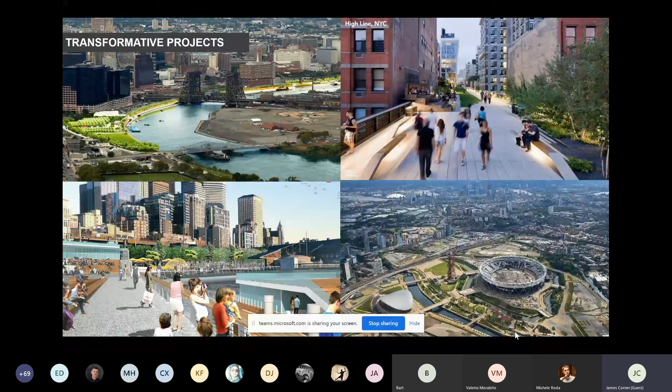I will get to that in a minute, because I wanted to just begin very quickly with a survey of what you would think Field Operations has been doing. I hope you know that we work on fairly big, complex and transformative projects — the High Line, the London Olympic Park, the Seattle waterfront. Our projects work with nature and ecology and environment, helping to bring green and nature and sustainable systems into the city. And we design essentially for people, for the theatricality of people being able to simply be amongst other people in public space.

The High Line, a landmark project, a wonderful garden in the sky, a promenade, in contrast to the urban fabric and the urban streets. The High Line has precipitated new buildings, new development, new economic investment on the west side of Manhattan. It's designed as a beautiful stroll, a series of gardens and plantings, windows and theatrical platforms where people can enjoy the drama of being in the city with others. There's artwork and very small details where the details become very important.

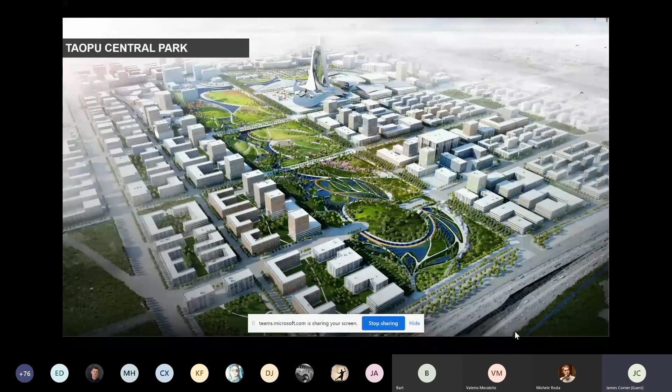In China, in Shanghai, we have this park, a new central park, very green, with new paths and plantings, viewing pavilions, new theatrical performance spaces, and a beautiful green park with places for discovery and for play and for families.

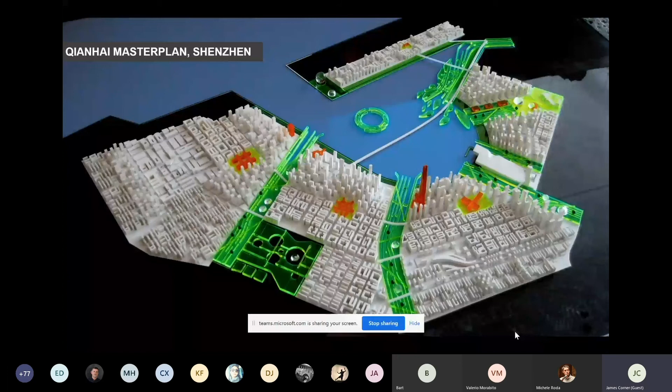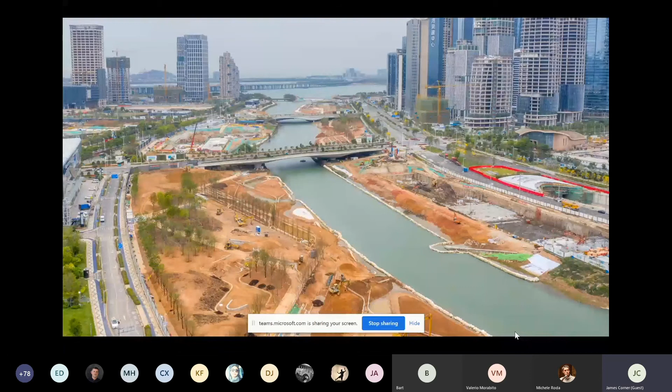And of course, you probably know our master plan for Shenzhen, a new city organized around green open spaces, functioning ecosystems, new waterways. It's under construction as we speak, with big new green urban parks being created, with new landform, new terraces, gardens and plantings.

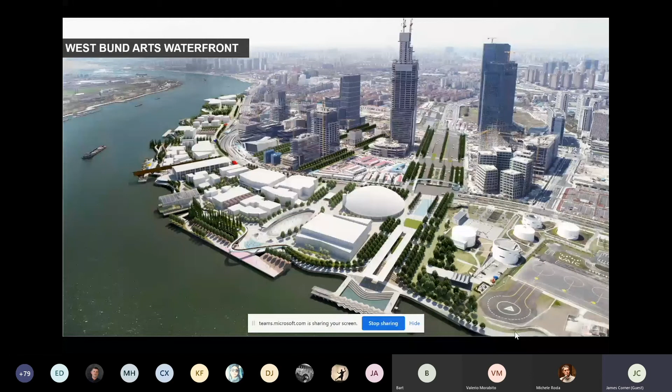And finally, a project we're currently wrapping up in the West Bund Arts waterfront with new spectacular experiences along the water.

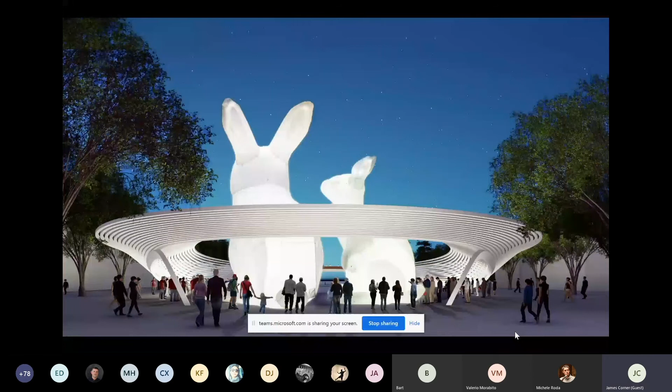Now, I moved through those slides fairly quickly because they paint a picture of projects that you're probably very familiar with. They are placemaking projects where design is very important, and the poetics of material and craft and detail and the iconography of design becomes foregrounded.

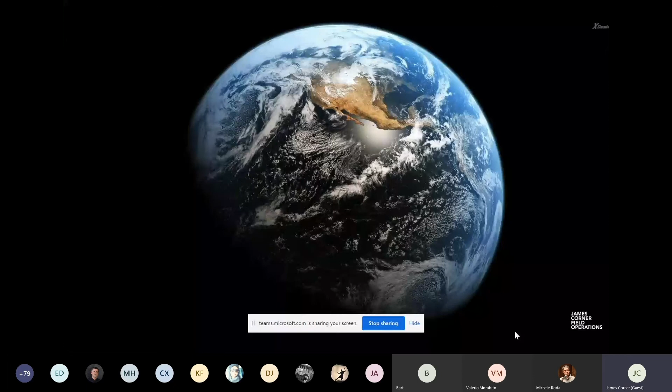But in 2020, there needs to be more, and we need to be thinking about how our skills with design can go a little further. It goes without saying that planet Earth is under incredible stress. We're seeing this with significant climate change around the world.

In an interesting newspaper article in the New York Times a few weeks ago, there was an essay called 'How We Broke the World.' It begins with the World Trade Towers in 2001, the economic crash of 2008, the current pandemic, and ongoing climate change issues. One of the quotes in the piece is that over the past 20 years, we've been steadily removing man-made and natural buffers, redundancies, regulations, and norms that provide resilience and protection when big systems, be they ecological, geopolitical, or financial, get stressed.

We've been recklessly removing these buffers out of an obsession with short-term efficiency and growth without thinking at all. At the same time, we've been behaving in extreme ways, pushing against and breaching common sense political, financial, and planetary boundaries. I find this very inspiring and important, that we try to come to terms with where we have been societally and globally over the past 20 years, and how we can make cities and places that we design more than simply beautiful places, but also places that are really doing things ecologically, environmentally, socially, culturally, and politically.

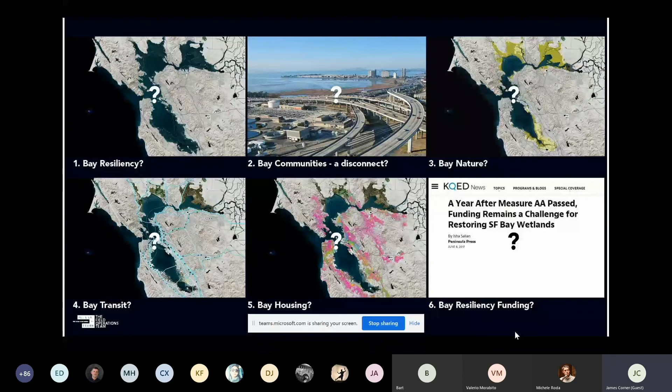This is all about San Francisco's bay. You can see here the Pacific Ocean, San Francisco in the middle, and the big body of water in the middle is San Francisco's bay. The bay is surrounded by significant urban development, many communities, tens of millions of people. It's subject to significant flooding through sea level rise and climate change, and many of the impacted communities are poor, disadvantaged neighborhoods. It's not only flooding, there are also problems with transportation, overbuilding, unaffordable housing, and challenges for new development in a difficult environmental context.

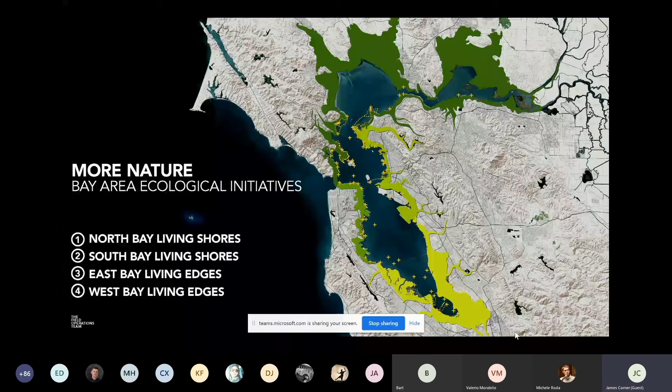So when we looked at this, we thought there needed to be three big initiatives. The first is more nature - let's try to find space for natural systems. The second is more connectivity - let's try to improve transportation and connectivity among communities. Thirdly, let's look at building new communities and new development, where we can have more affordable housing and enhance quality of life.

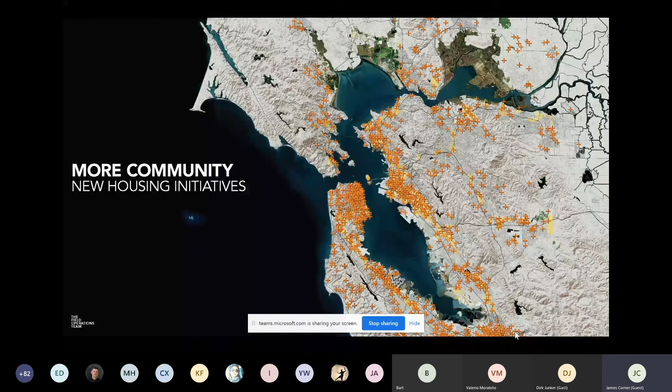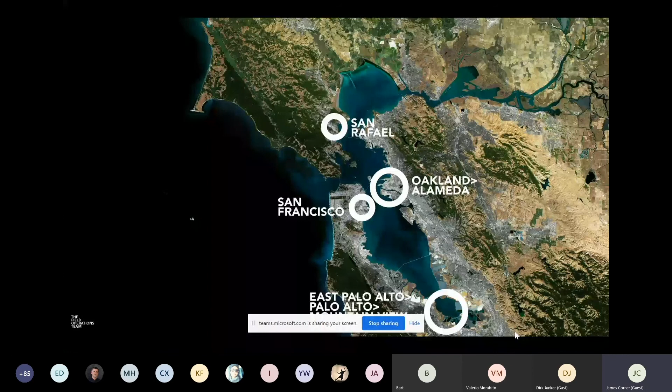So it leads to a massive regional approach: more nature, more connectivity, more community. We looked at a number of local situations around the bay, which we called bay towns. We began by looking at edges, because edges are where you have the land-water interface.

So it's a landscape and ecological approach combined with urban design and urban planning. These systems together create a kind of catalog for how we work with different edges, landscapes, corridors, and types of development hubs.

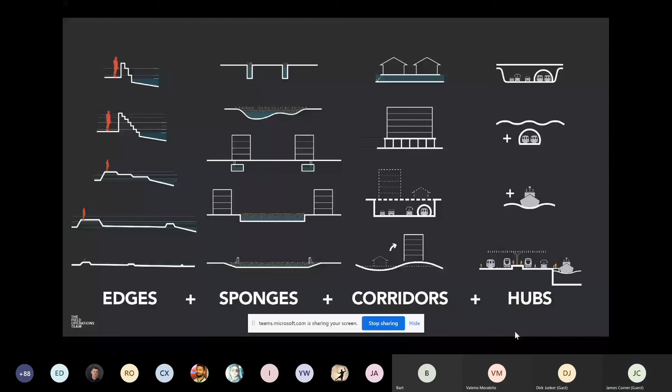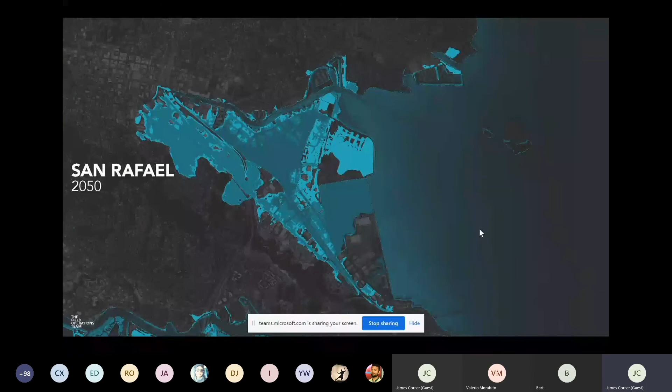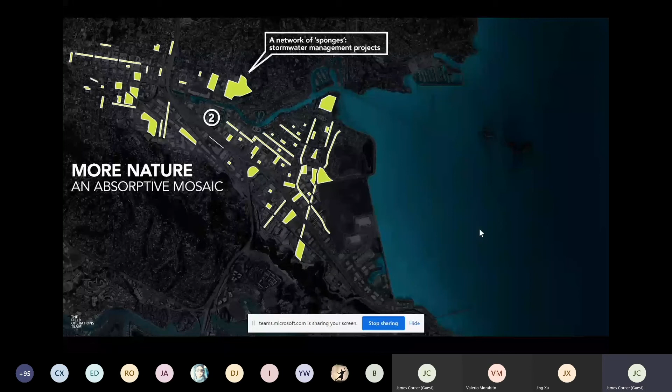One of the places we looked at was San Rafael today, and the flood threat in the next few decades. These are some images of what San Rafael looks like - a lot of challenges with infrastructure, low-lying conditions. So what we propose is a new edge with a new sponge landscape, a number of absorptive landscapes inside the town, which allows us to project a new development plan bringing new building, new housing.

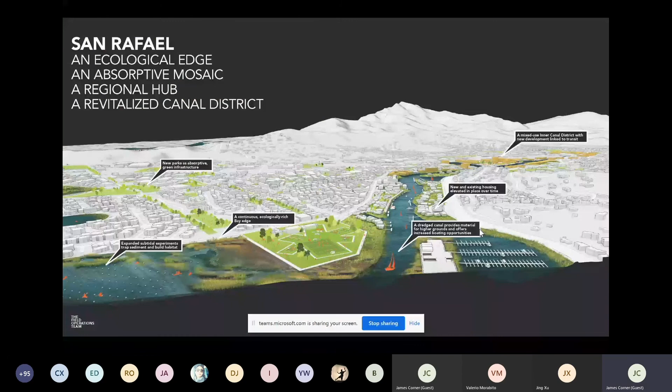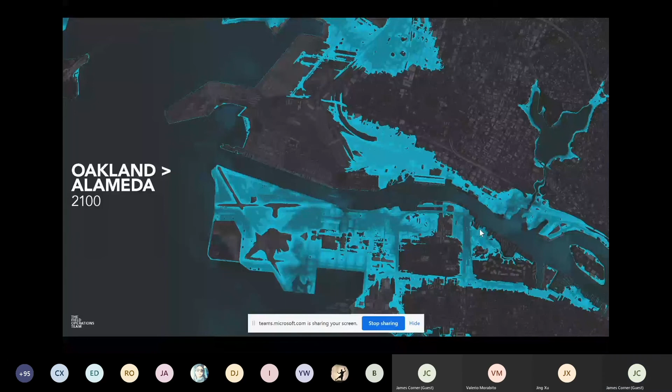This brings new economic development, as well as significant new landscapes, new parkland, and new infrastructure. In Oakland, a very similar situation with low-lying communities - some pictures of Oakland. Again, a similar strategic approach to how we would work with flooding by redesigning edges and aligning new development alongside new landscapes, producing a new kind of scheme.

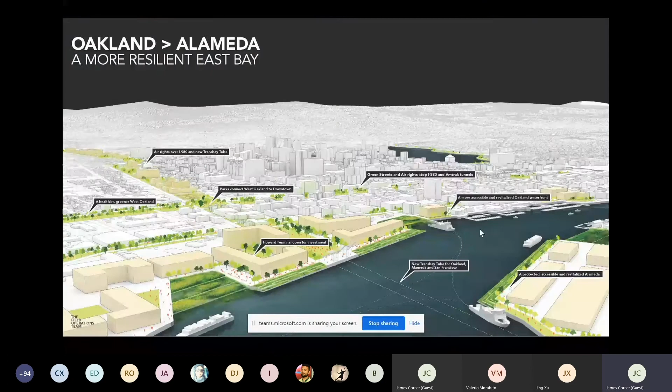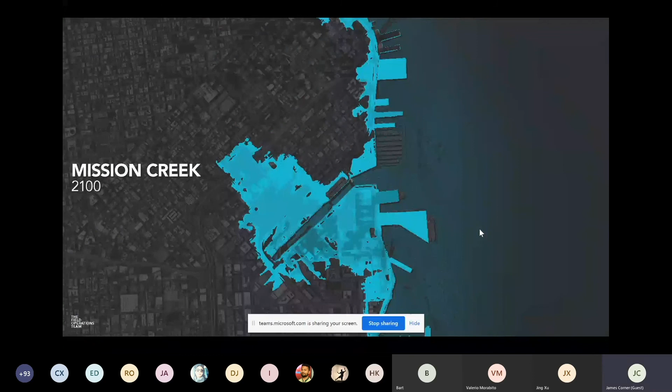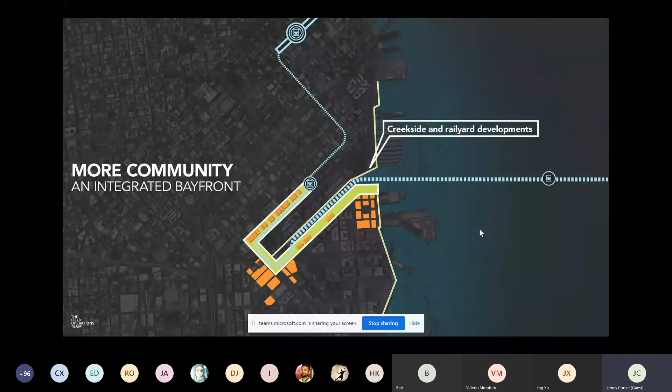A third area is Mission Creek in the center of San Francisco, subject to significant flooding. Something about the character of this place - again, a strategic approach where through landscape infrastructure we could build a protective environment that also allows for new economic development, new housing, new communities, new transportation, integrated with new ecological landscapes.

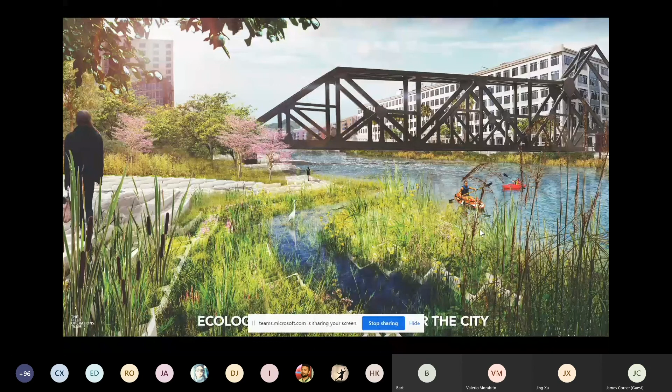And finally, what is called South Bay. This is where Silicon Valley is, but it's also where you have billionaires living just half a mile away from some of the poorest people in San Francisco. This is a massive area subject to a lot of challenges, not only flooding but also transportation and development challenges. Look at the density of the building there compared to the wetlands and the bay.

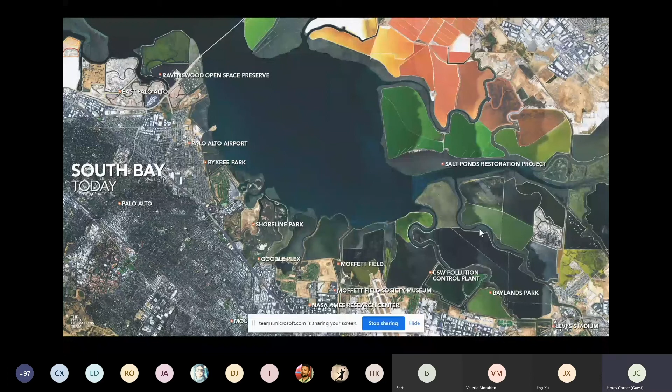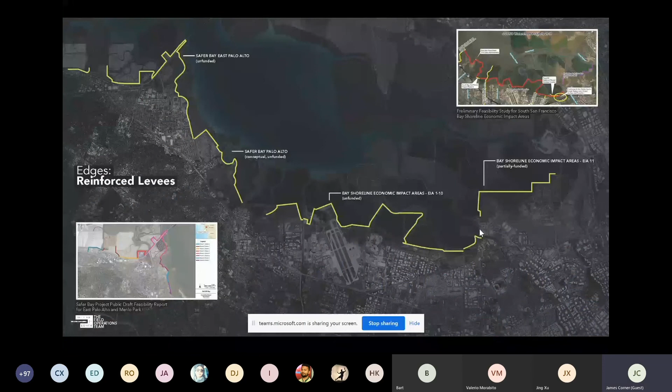All of that area is subject to significant flooding projected for 2050, with not only flooding but also erosion and damage to infrastructure. So we have a series of studies that have to do with the levees, the streams and creeks, the various salt ponds, flood basins, and so on.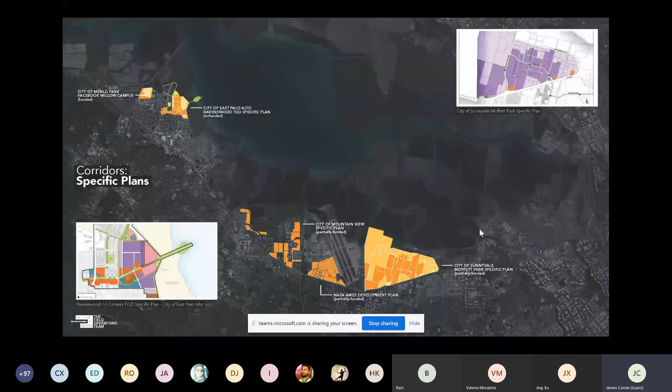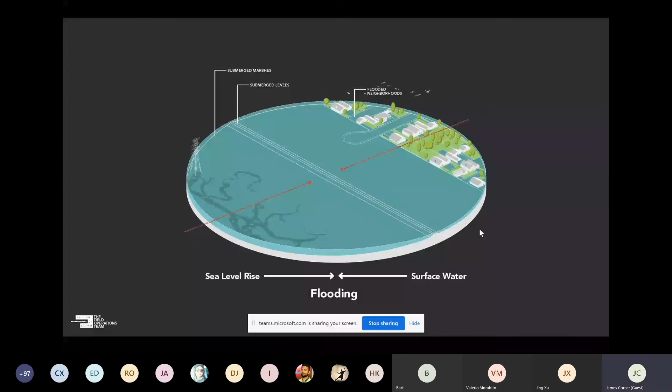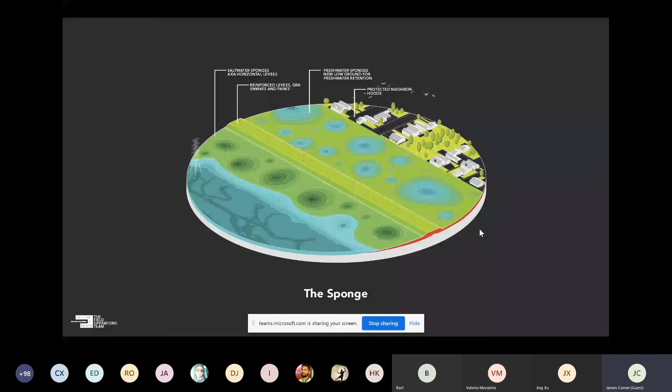Then we develop a strategy and say, look, this is the water's edge today. If we don't do anything, all of that will be underwater. So what we want to do is build a new absorptive landscape, a sponge landscape that would function like a sponge, where nature itself becomes an ecological system.

We begin with what we call the soil swap. The soil swap is literally digging soil out of the marshes to build higher ground for new development. We identify a number of sites where this can happen.

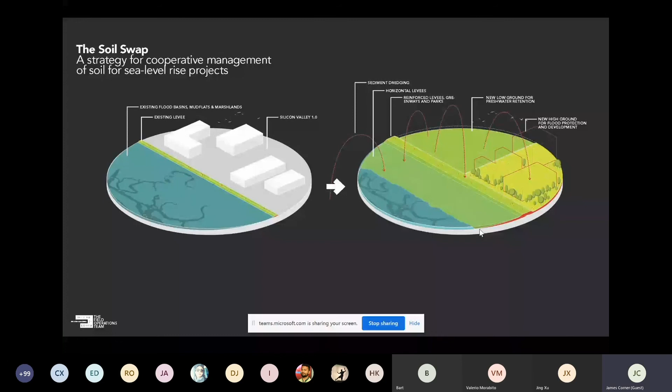And show how you can develop ecological landscapes as well as redevelopment landscape.

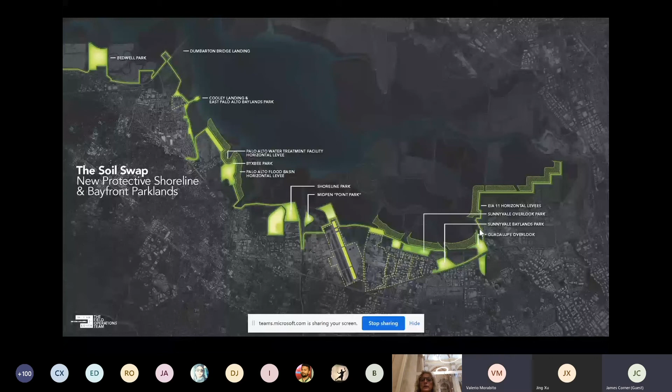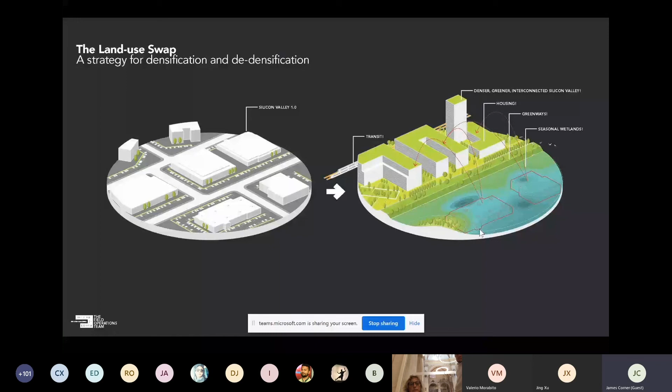And secondly, the land use swap. This is where we densify building. So instead of large footprint buildings that cover a lot of area, we build in a more dense and compact manner, thereby opening up landscape that can be part of the new ecological system.

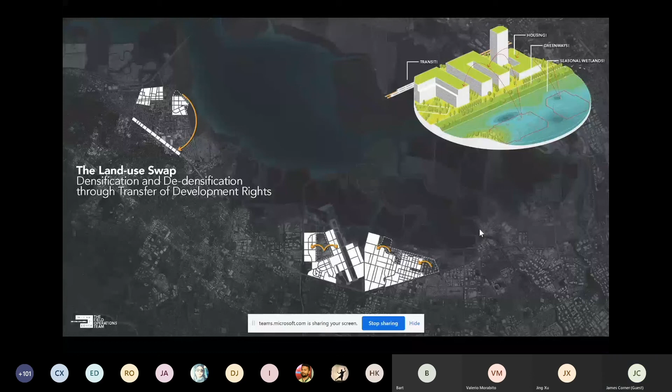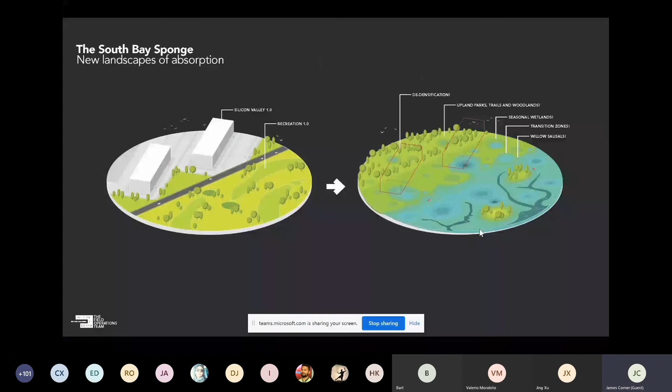So, without going into too much detail, you can see a landscape strategy here that allows for urbanization and development, but also accommodates and builds new landscapes to work with issues around climate change, flooding, and the environment. The third strategy is the sponge itself, building extensive new kinds of wetland.

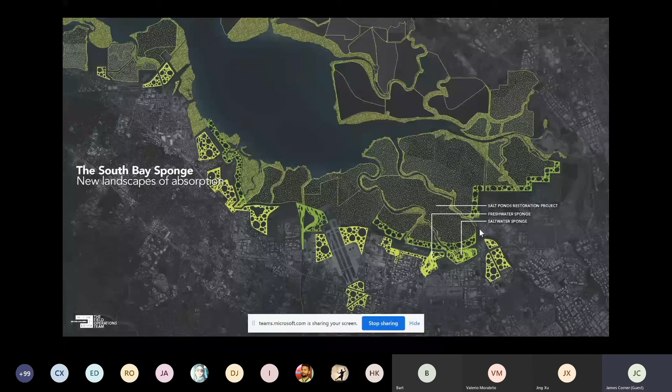And you can see in this diagram, bringing some of that inland too, to work with some of the streams that have flooding challenges. These are the creeks essentially, and the sectional profile of that. This produces a vision for a new sponge-like absorptive landscape working with creeks and the bay, while building new land for more compact mixed urban development, new housing, commercial space, and institutional space tied to new transportation systems.

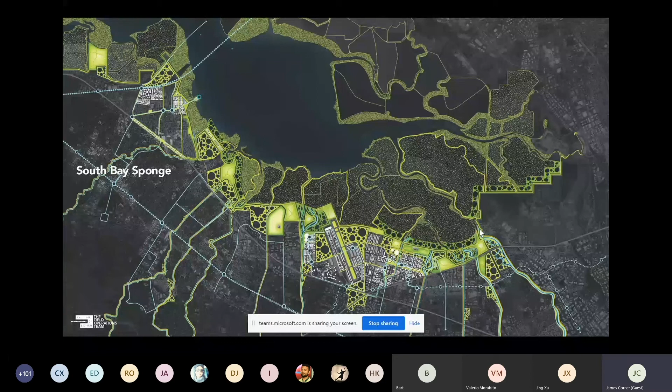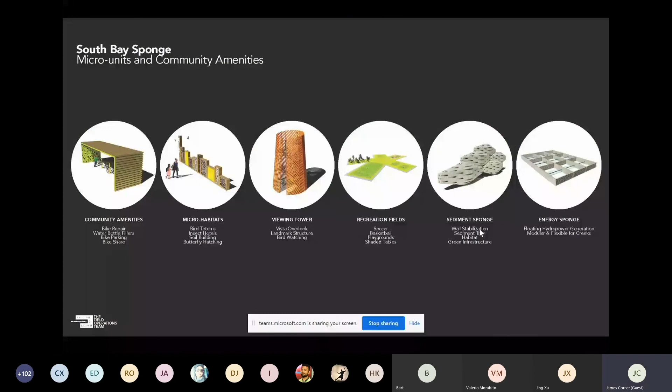It's a very holistic approach, if you will, where you can see the situation today and the situation tomorrow, with new social spaces, new waterfront spaces, open spaces for sports and recreation and parkland, but during flood, these can absorb the flood water. Various amenities, and a number of other instances here.

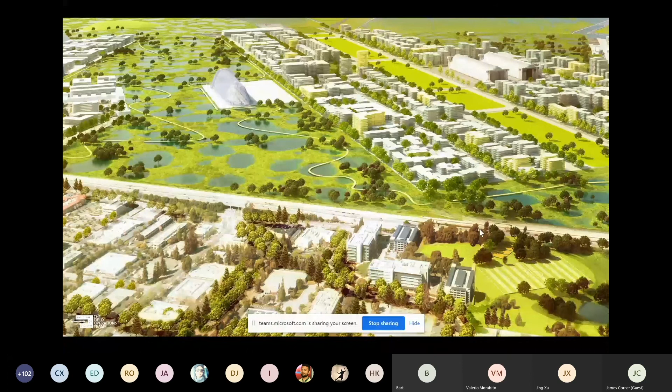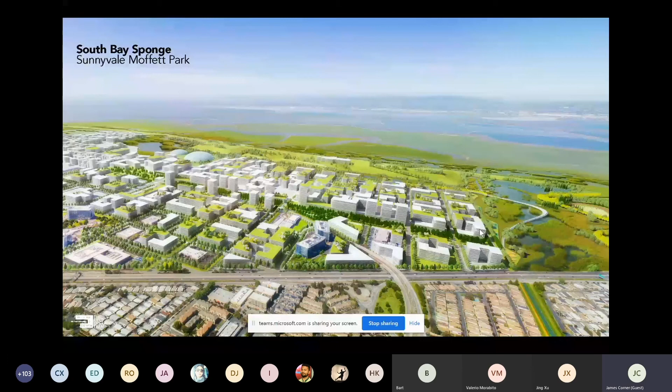I'll click through these quickly, but just to give you an impression of how to work at a regional urban scale of planning, and bring it all the way down to design that is comprehensive and inclusive of urbanism, architecture, infrastructure, integrated with green ecological systems.

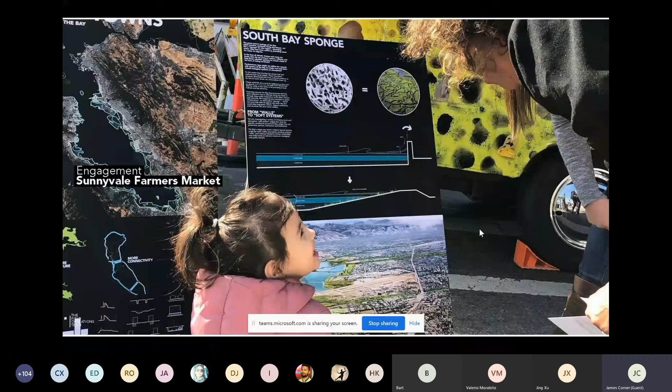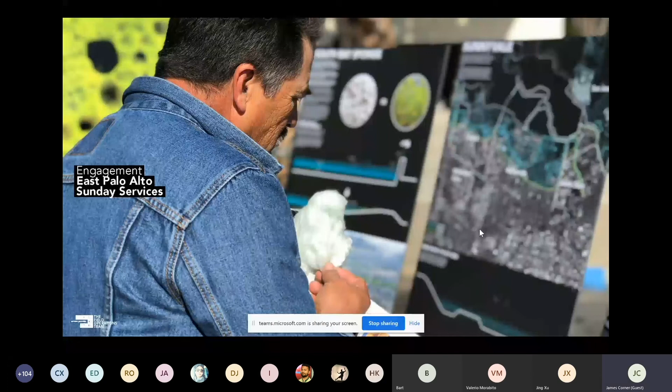Finally, it was important to communicate these ideas to the community so we could get buy-in and people could understand what the project is about. To do that, we created a vehicle that we could drive from place to place. We used this vehicle for candy floss and ice cream, but also to give out information and explain to regular people what this vision was all about. As planners and designers, we need to work at a very high level, but we also need to be able to communicate to regular people.

We created these sponge baths where people can understand how sponges can absorb water and how you can squeeze water out, and how you can begin to build landscapes that essentially bring water levels down. So there's a very playful and fun and interactive side to this.

I wanted to share this project with you because it is a very good example of thinking at a very large, regional scale, but bringing it all the way down to individual places and individual people, foregrounding design, ambition, and transformation in a way that addresses issues of 2020: climate, environment, social equity, development, affordable housing, and urbanism more broadly. So we call this soft infrastructure for climate adaptation.

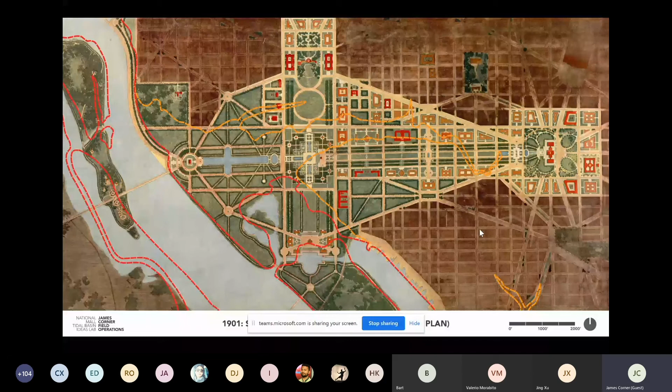So it's a very interesting history where you see the build out of Washington, D.C. over these marshes and wetlands. This was in 1901, and then the tidal basin itself was built around 1920, initially as flood infrastructure. You can see here a map of Washington, D.C. today with the two primary axes.

All of the museums and institutions are around the mall and the tidal basin, with a variety of roads and bridges. These are the two primary landscapes: the mall, very formal, axial, grid-like, rectilinear, processional; and the tidal basin, more pastoral and romantic. This contrast between the pastoral and the formal is very vivid.

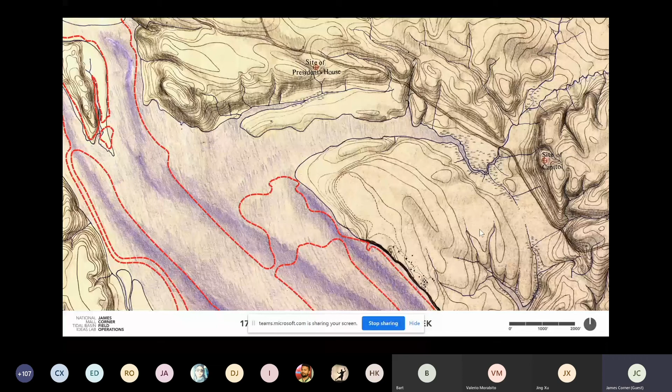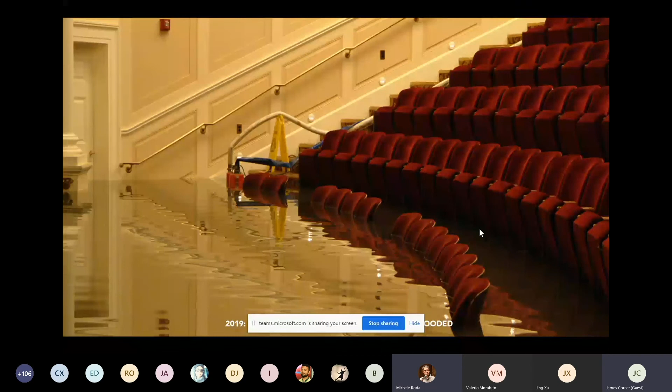Floodwaters coming up into the buildings, into museums and institutions, flooding the interior buildings. You can see here more floodwaters affecting the infrastructure of the city. So this is very important and very significant, costing billions of dollars in insurance and in trying to repair.

So when we look more closely at the tidal basin itself, you'll see that it's an interesting pastoral configuration. There are many cherry trees around the perimeter, which are very popular in the springtime, with millions of visitors during the month of April, but also very beautiful throughout the year, with very beautiful seasonal qualities.

The Jefferson Memorial, the FDR Memorial, the Martin Luther King Memorial, and views across the tidal basin to the Washington Monument—these all have significant axial and vista relationships, as well as topographical relationships.

They're all situated at certain elevations. And when you look at the historical engineering plan, you can see just how low the land is relative to water.

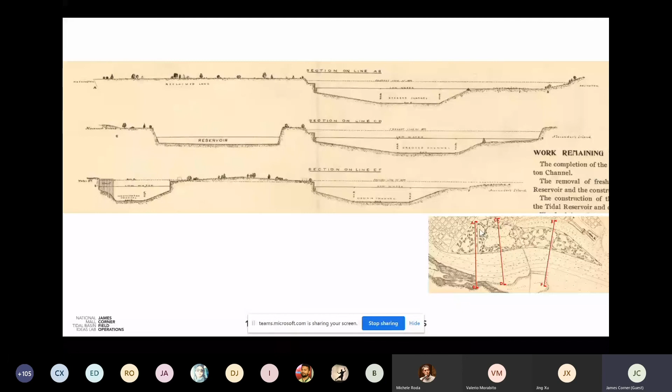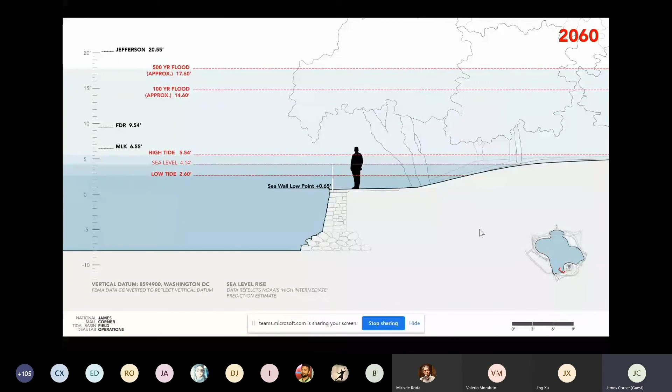And this is the situation today in 2020. During a flood, the entire tidal basin is underwater. And that's only projected to get worse over the next decades, where basically even on a daily tidal cycle, the entire basin will be underwater.

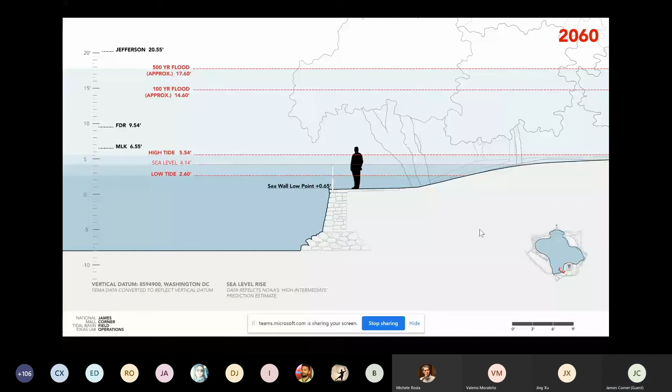And you can see that this impacts the memorials, impacting the Jefferson Memorial. This is a scenario, if you will, where if nothing is done, by 2060 the entire basin will simply be a body of water.

And so we wanted to paint 3 possible design scenarios working with this. The first one we called curate entropy. Here we're saying, what if we just let it all go? What if we let nature take over? In a sense, this is already happening—there are already places where it floods.

Three designs now. The first one is working with nature, allowing the place to begin to deteriorate as nature takes over. This is already happening to some degree—you have these edges where water is beginning to slowly encroach into the landscape.

There's a project in San Francisco called Alcatraz. It's an old jail, and it has been allowed to become a ruin. There are other examples of ruins being taken over by nature.

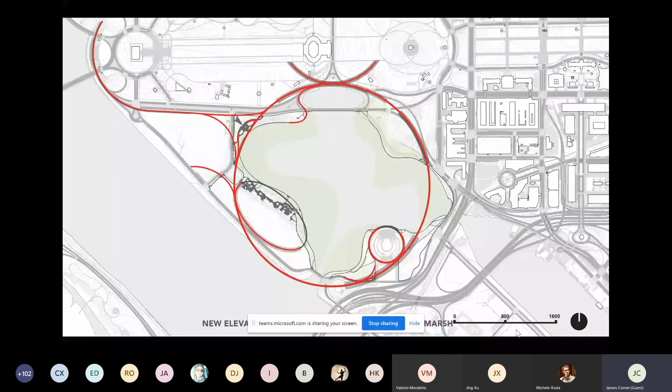We use this to showcase the monuments, and we overlay this earthwork and structure onto the existing site with a new tree canopy. And you begin to get an illustrative plan like this, where the site is beginning to transition into wetlands and woodlands.

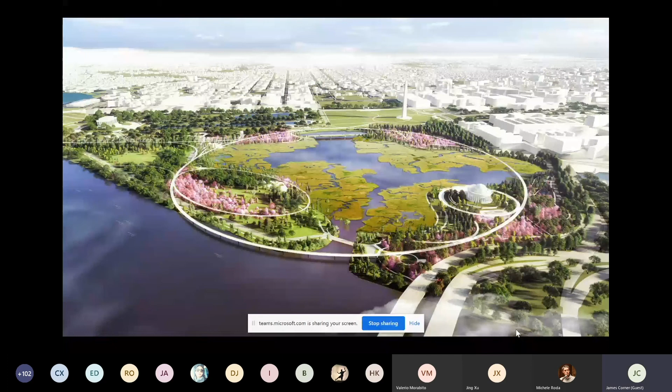But the ring is the new geometrical figure that allows people to still experience and see the site in transition, and at the same time connects into the National Mall while also protecting it.

So you have this elevated walk. It brings you into a new relationship with the monuments, bringing you face to face with some of them.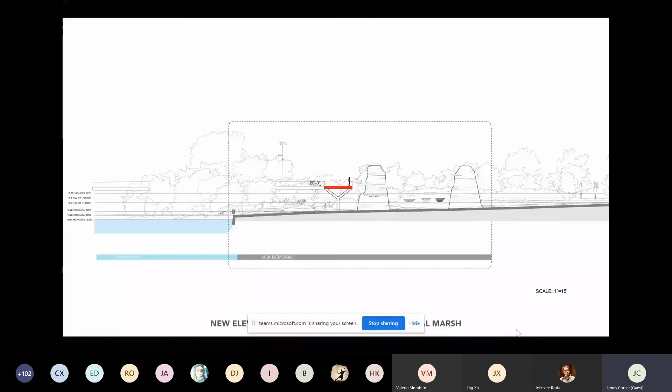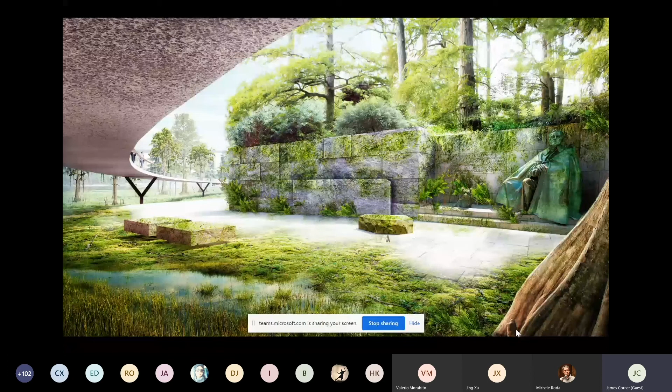I love this rendition of FDR being allowed to become a ruin with mosses and ferns, beginning to decay over time as nature takes over.

And at the same time, being able to absorb and work with daily flooding, the rest of the landscape begins to transition into marshland. You get a rather melancholic, almost dystopian relationship between a landscape that is turning to nature, beginning to become totally naturalized, but in the context of Washington D.C., and even projecting vegetational change over time. These swamp cypresses grow further south, but in 30 or 40 years will easily be growing in a much hotter and more humid Washington D.C., as the landscape itself begins to transition into something totally different.

And the Jefferson Memorial now sits in a swamp. Very poetic and provocative and suggestive and indicative of what might happen if we just let the whole thing go to nature.

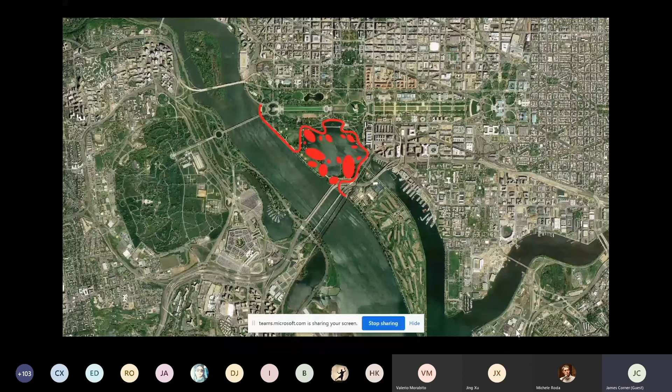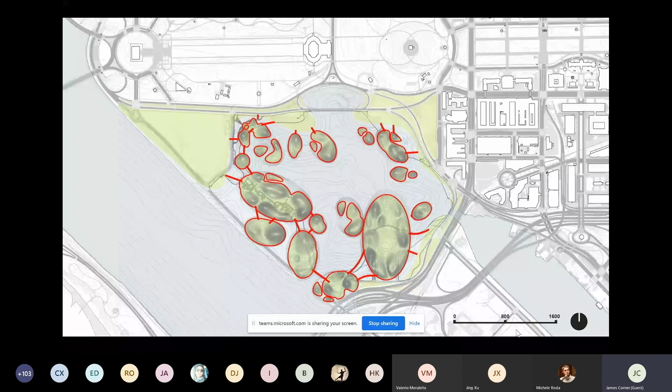This is the diagram of a new flood wall with a series of islands. The islands float in now permanent water, connected with a series of bridges, and topographically constructed as a series of hills and gardens and hollows. And it creates a new topographical landscape, a totally new kind of destination where earthworks and hills and new plantings are creating a totally new global series of gardens within which the monuments can sit.

And so what you get is a very pastoral, but also a sort of abstract or dramatic landscape that's topographical with hills. It's not simply a flat landscape. And it's a place where you can journey around from island to island to island with new vistas and new views and new relationships.

And I love this view looking across what is now permanently flooded water, looking through the islands to the Washington Monument, or across to the Jefferson Memorial, with a beautiful series of plantings and gardens, and the monuments now set in a sense in a much greener kind of landscape.

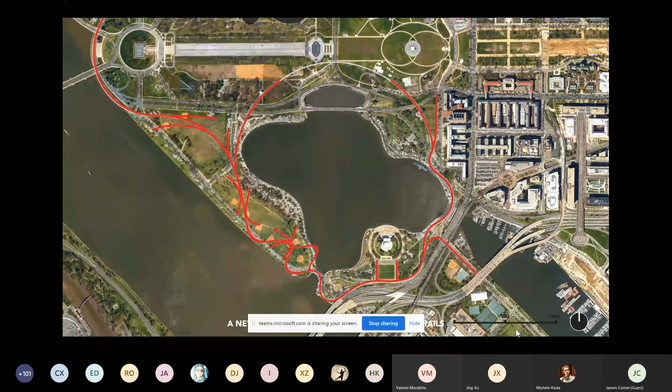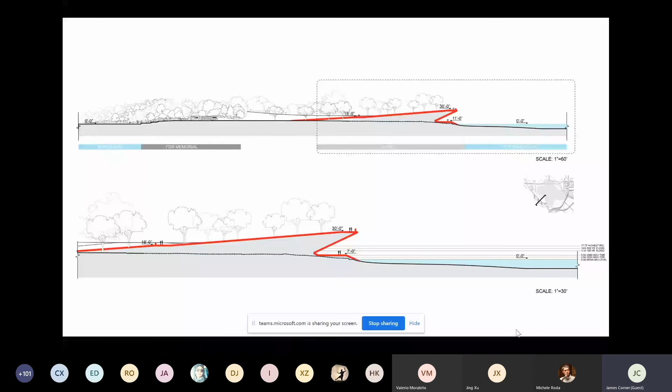It allows for total preservation of the interior. You can see here the geometries of the line work allowing for a raised walk on the earthwork, but also a series of walks and ramps and pathways that connect down to the basin. And this delineates the extent of the work. And because it's an earthwork, we now have interior space, the potential to actually build interiors inside the sculpted earth form.

So here you see the overlay of the earthwork onto the site with new vegetation, the preservation of an essentially pastoralized tidal basin, protected by now a significant new landscape investment. It's parkland with new trees and plantings and pathways, offering new amenities and new vistas and vantage points, especially across the river, while allowing the historical integrity of the tidal basin to remain. And again, connecting seamlessly into the National Mall.

And because we're shaping the earth, we can also shape new balconies and new promontories and new overlooks. These two overlooks, one is looking over the Potomac River, one is looking into the basin. On the Potomac side, we create a new riverfront esplanade with two levels, a lower level that can absorb floods and an upper level. And on the tidal basin side, we have a new building underneath the promontory to serve as a new visitor center.

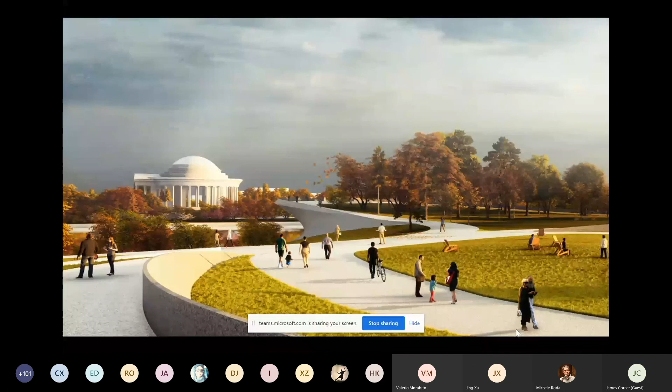And you can see the visitor center, but also the raised overlook above. And that overlook offers great views across to the city. You see this rendering here with the Jefferson Memorial, the new earthwork by the river, new spaces for people to gather and to assemble, to stroll, to sit and to have events. The Jefferson Memorial, and views out to both Jefferson and Washington, and essentially the preservation of the interior.

So the first scheme is about letting nature take over, very time-based, melancholic. The second scheme is about a new kind of transformation, something totally new, but at the same time retaining the historical attributes of the place. And the third scheme allows for full preservation, full protection, while building a new kind of landscape around the perimeter.

And with that, I'll share this one-minute video animation to end.